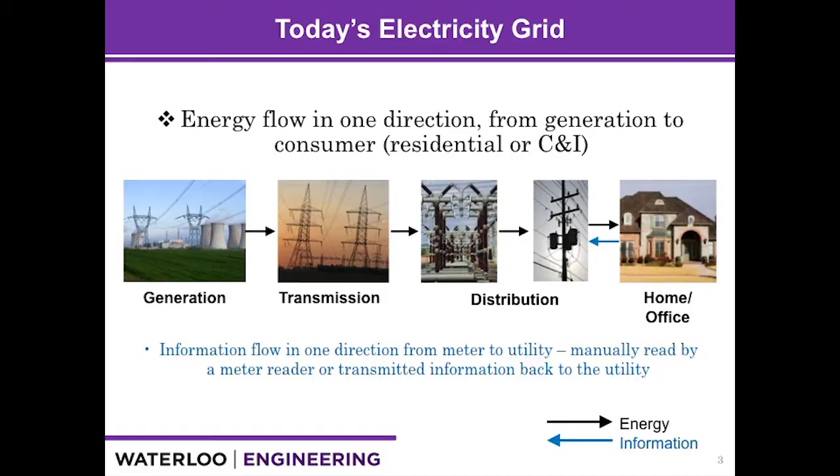Thank you so much. It's a great honor to have the opportunity to introduce our work on the rechargeable zinc battery here. And since our panel topic is energy, right? Definitely, we will mention energy is critical in the next decade, because we have more and more people, right? And as you can see here, the top problem that we are facing in this century will be energy. So since energy is important, the majority of energy that we are using actually is in the form of electricity.

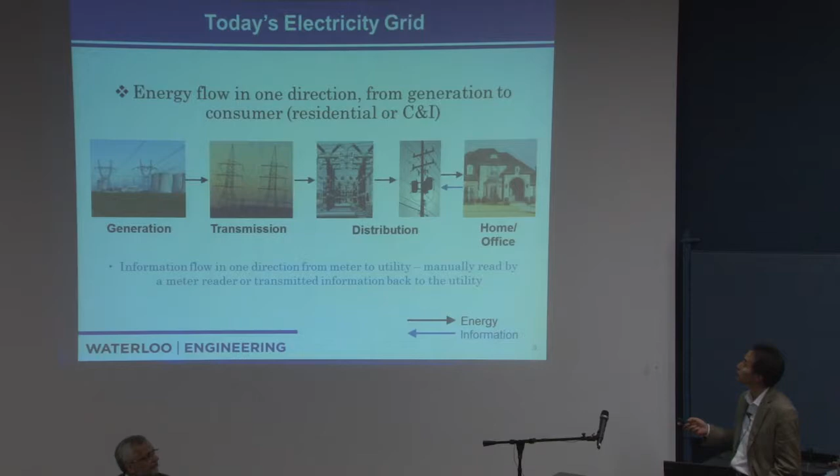So when we talk about electricity, we have to talk about our grid. Today's grid is more like this: from generation to transmission and distribution to the home. So mainly it's only one direction, and only between distribution and home is there feedback. So this is today's electricity grid. Then for the electricity grid, there is a big chance for us, because at the current stage we need more and more electricity, so we need more electricity grid.

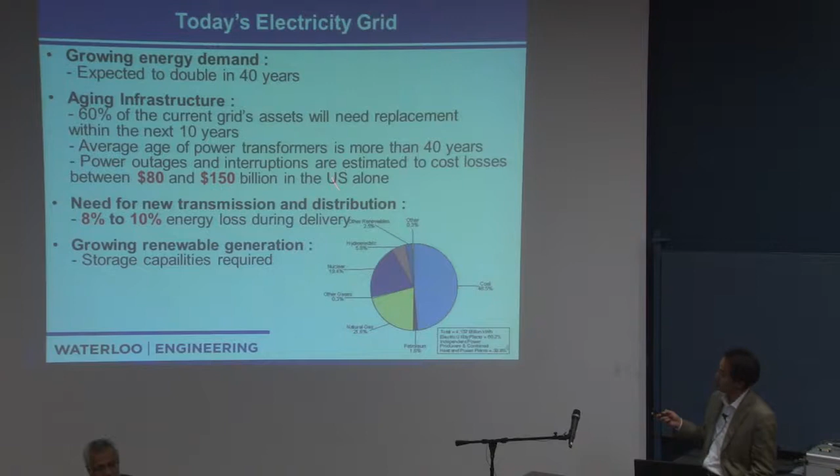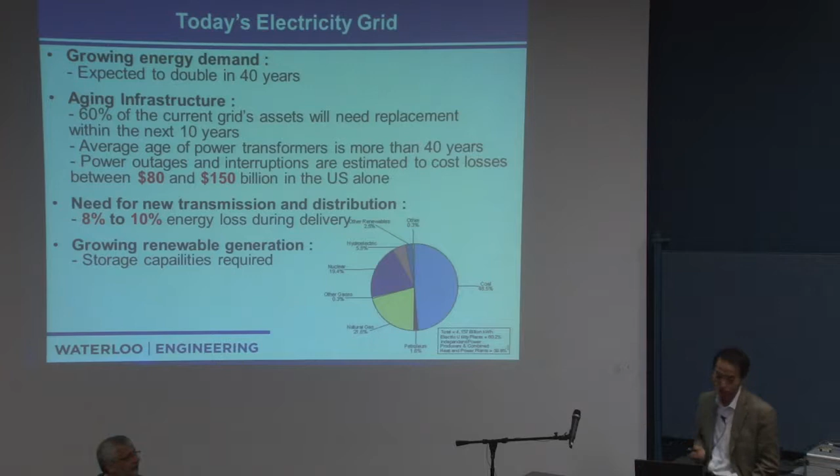So in North America, especially the U.S. alone, in the next 50 years, $80 to $150 billion will go to the electricity grid, right? And also, at the current stage, when we deliver electricity, there is a big loss, 8 to 10%. So in order to improve the electricity efficiency, we should try to go to what we call a smart grid. So what's the smart grid?

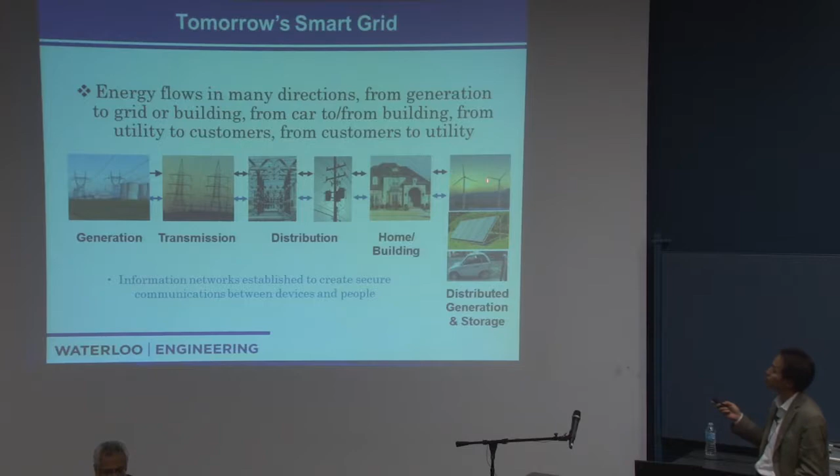So this is a schematic of the smart grid. We call it the next generation grid, or tomorrow's smart grid. The difference with this smart grid is there is more feedback, right, between each system. Between generation and transmission, you have communication with each other, and also between transmission, distribution and the home. Especially, another system is introduced, which is renewable energy with the electricity transportation system. So this is the difference.

If you take a look, the difference between tomorrow's smart grid and today's electricity grid is that this smart grid has another important component, and also more communication among them. So that's the smart grid. With tomorrow's smart grid, it is expected that we can reduce carbon dioxide emissions greatly. And also we expect to save a lot of money, because it can improve energy efficiency, right? And definitely, by using the smart grid, we expect we will pay a smaller bill, right? Lower bill.

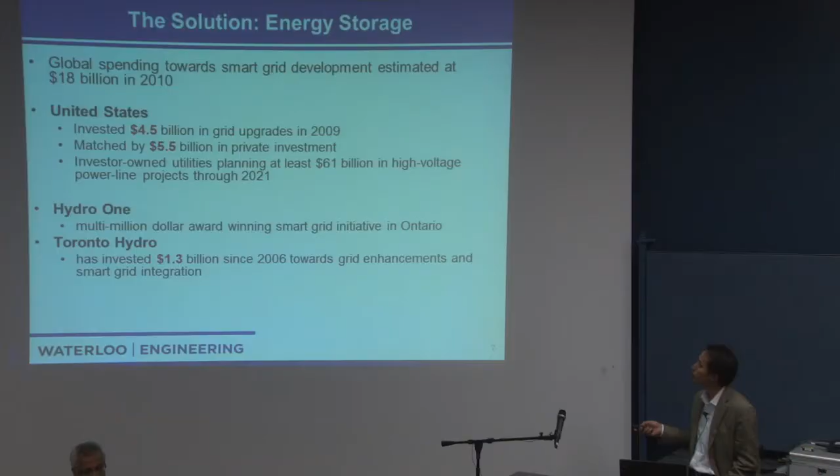So with this expectation for the smart grid, if we go to our local area, like Toronto Hydro, since 2006 they have invested $1.3 billion into the electricity system, and in North America it's even bigger. So for the smart grid, one of the biggest challenges, I would say, is dealing with energy storage. For each section of the smart grid, we need an energy storage system.

Especially when you go to the substation scale or residential scale, we need a very good energy storage system, which is related to the battery technology or the hydrogen technology. So in order to make the smart grid happen more efficiently, we have to find a very good, low cost and high efficient energy storage system.

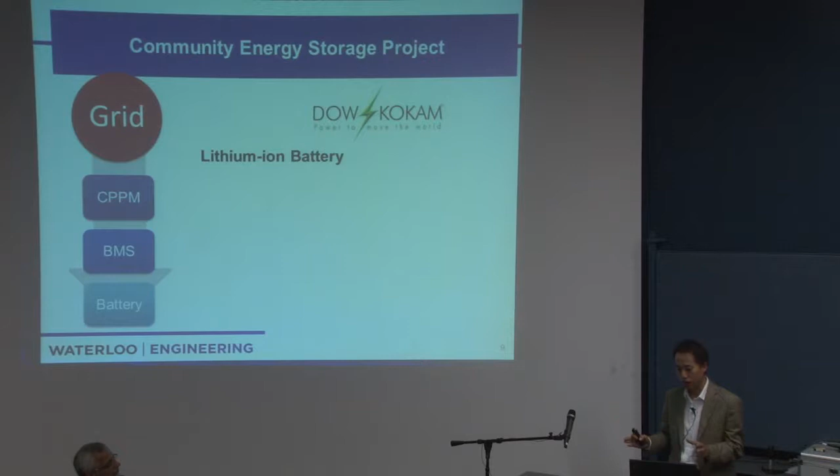So with this goal, when we talk about the smart grid, this is actually the slide provided by Dow Kokam. Dow Kokam, as you know, demonstrated the first stationary energy storage system for the smart grid locally in Toronto. As they claimed, for the smart grid system, if you take a look at this slide, the battery will cost 60% of the total smart grid system application.

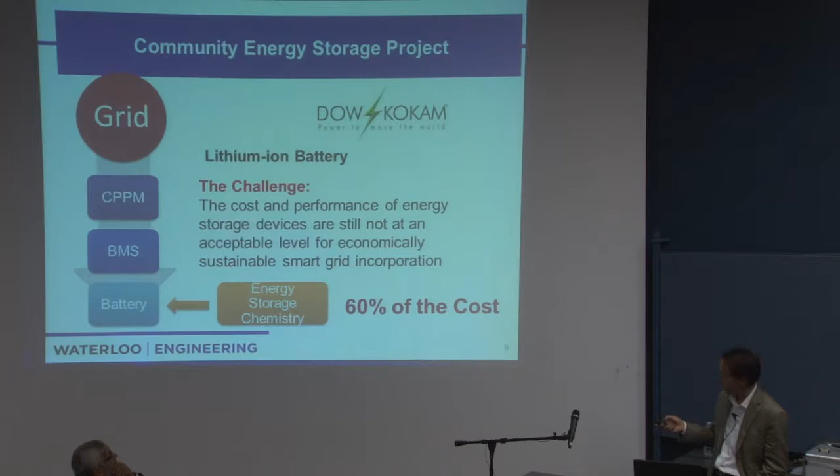So which means if you want to make the smart grid widely available, you have to reduce the cost. At the current stage, the biggest challenge is the high cost for the smart grid. And the biggest cost actually is from the battery, because they are using the current commercial lithium battery technology, right? So with this challenge, the battery is very important, right?

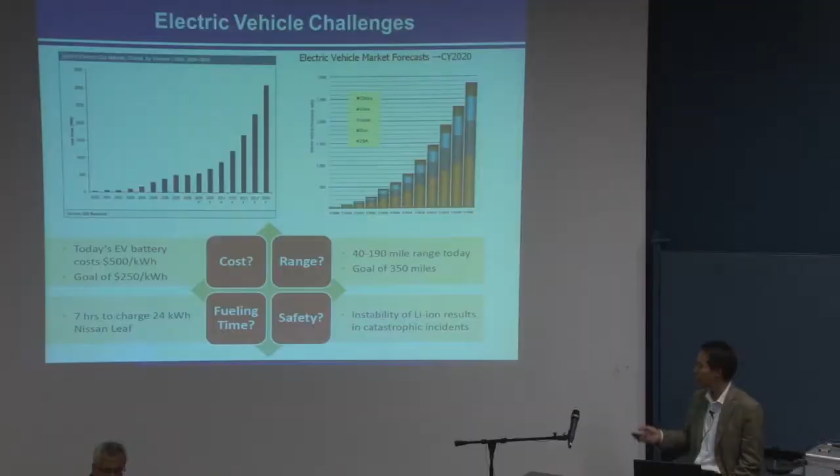And also talk about the electric vehicle. For the electric vehicle, the biggest challenge will also be the battery technology. At the current stage, cost is very high for the lithium battery. And also the range, because the energy density of the lithium battery is still not high enough. For a regular vehicle, we need 1 ton of lithium battery, and the range is not good enough. And you need a long time for charging the battery, so the fueling time is also a problem.

And talk about the safety for the lithium battery technology. Safety is still an issue, right? If you take a look at this slide, you see there is the combustion or explosion problem when you use the lithium battery-based electric vehicle. You must have heard some news. Even the Boeing 787, in the past few months, you heard the story, the Boeing 787 is delayed because of the lithium battery technology used in the airplane.

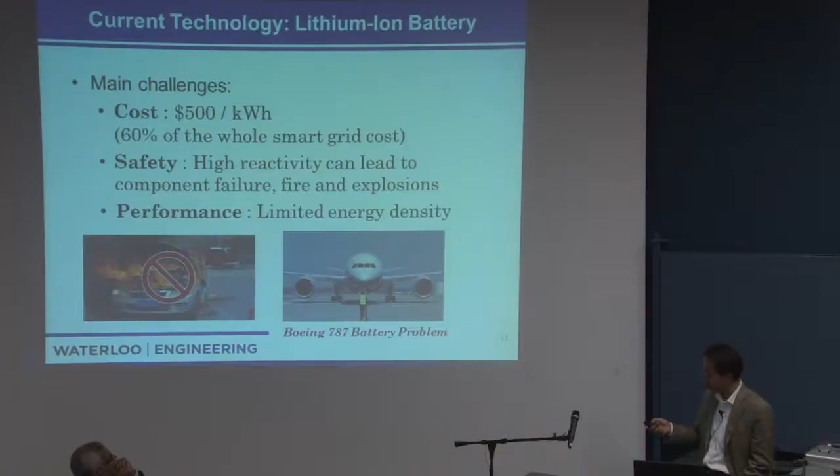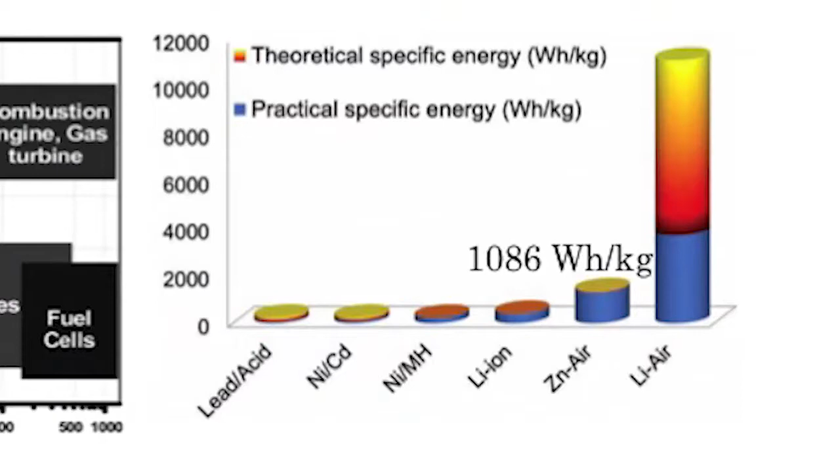So with this challenge, we take a look at this chart. Number one is definitely cost and also energy density. Talking about energy density for energy technology at the current stage, we have electrochemical energy storage systems: supercapacitor, battery, and fuel cell. Fuel cell has the highest energy density, followed by the battery. In this chart, these four are popular commercially available battery technologies: lead-acid, nickel cadmium, nickel metal hydride, and lithium battery. The lithium battery has the highest energy density among these.

But if you take a look at the zinc-air battery and the lithium-air battery, they have even higher energy density than we expect. Because of this high energy density, in academia and also in industry, we think this technology will be the next generation battery technology. That's the reason a lot of research is focusing on this. But the question is, since this technology is so good and the energy density is so high, why is it still not commercially available? There is a reason. So let's take a look.

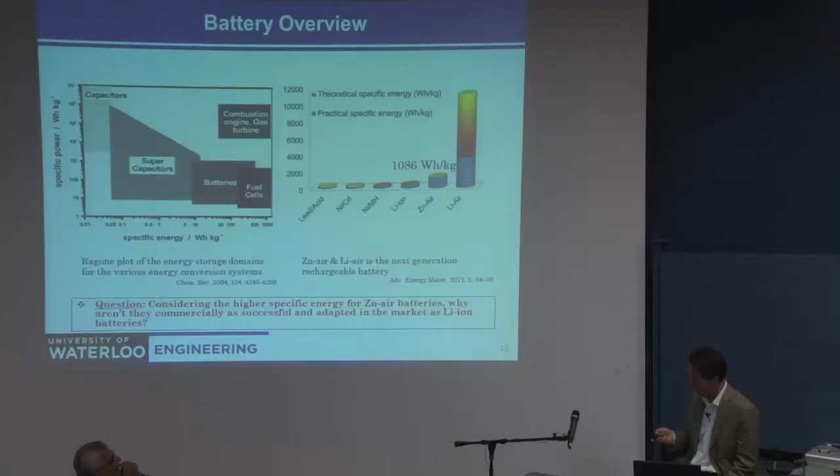Before we look at the reason why it's not available, let's go to the advantages of the zinc-air battery. For the rechargeable zinc-air battery, the reason we think it's great, more specifically, is high energy density. If you take a look at this chart, the energy density is almost 5 times higher than the lithium battery. Which means with the same size, you can provide more power, and the battery can last a longer time.

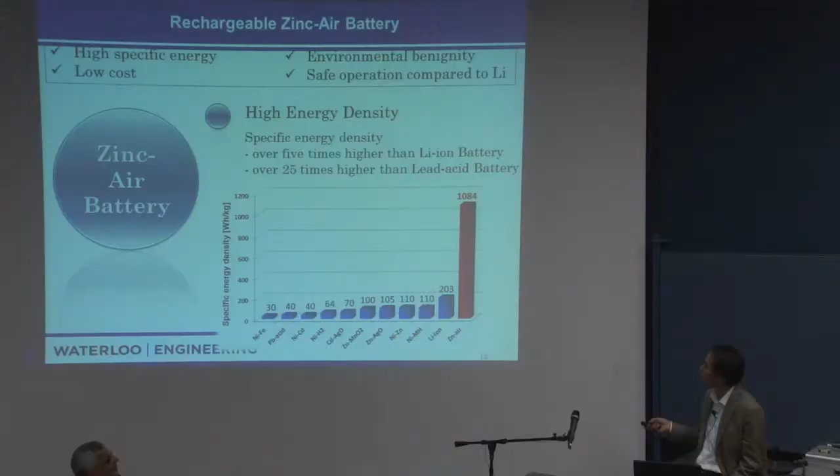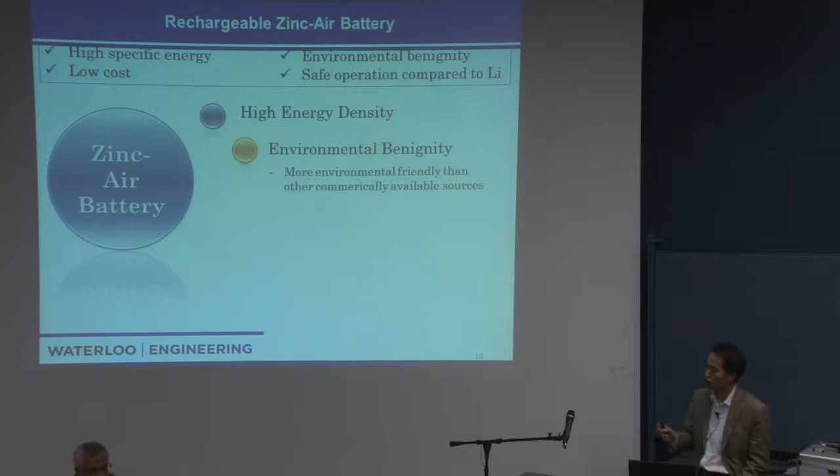And also, the zinc-air battery compared with current battery technology is more environmentally friendly. For example, lead-acid battery, we don't like lead, right? It's environmental pollution. So compared with the current commercial technology, this is much more environmentally friendly. And also low operation risk, because for this technology we are not using organic electrolyte, so we don't have the combustion or explosion problem. And at the same time, the materials we are using in the zinc-air battery are much cheaper.

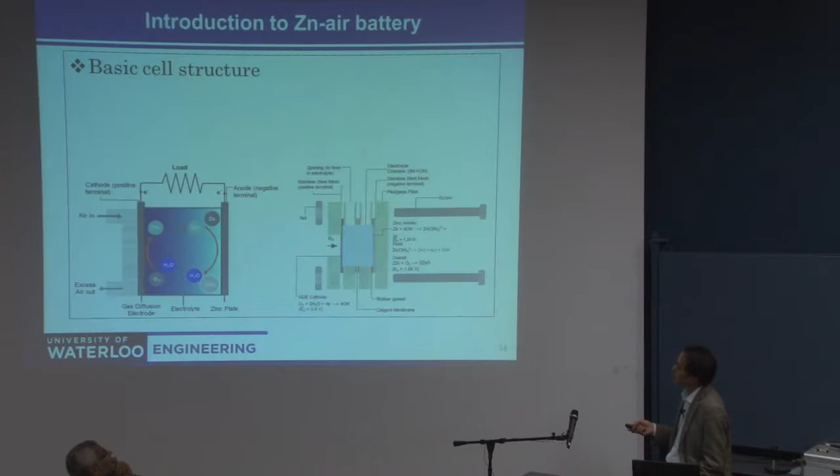So compared with the metal cost, you see the zinc is only $2 per kilogram, but the lithium is $32 per kilogram, right? And also, especially in Canada, we have large zinc deposits, right? So we can use it easily. It's fairly available.

So with this advantage, the previous question is why is the rechargeable zinc battery still not available? One of the main reasons is actually there is no commercially available catalyst for this technology. The reason is because if you take a look at this zinc battery, for this reaction you need a bifunctional catalyst. We call it a bifunctional catalyst because it must involve 2 reactions. One is during the discharge, there is an oxygen reduction reaction. So that produces electricity.

So when you charge the battery, this oxygen reduction reaction needs to be reversed. We call it the oxygen evolution reaction. Which means these electrode materials, or say the catalyst, need 2 functions. It needs to be active and highly durable for both these reactions. Not like the fuel cell, which is only one direction, just discharge. So that's the major reason this technology is still not commercially available.

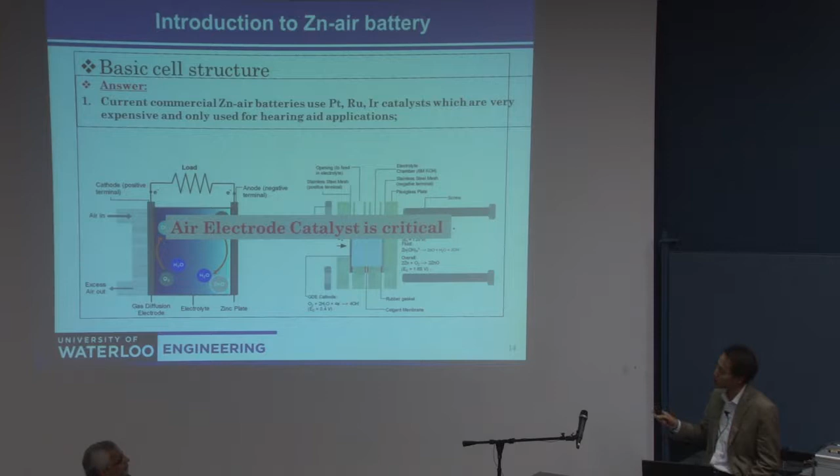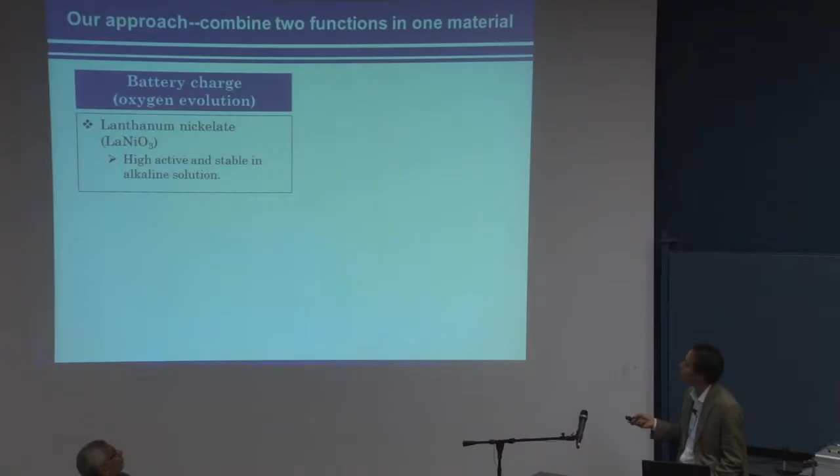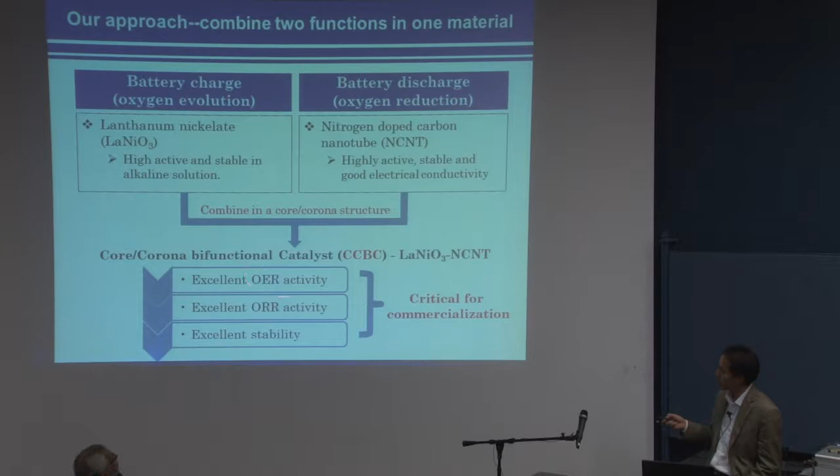And even the precious catalyst, it's good, but the performance is still not good enough for this application, and the durability is very poor. You will see the performance later. So our approach, which we developed at Waterloo in my group, is using nanotechnology design. We designed the core-corona structure catalyst. We call it a bifunctional catalyst. We hope to have excellent OER and ORR activity and also stability. That will relate to the lifetime of the battery, right?

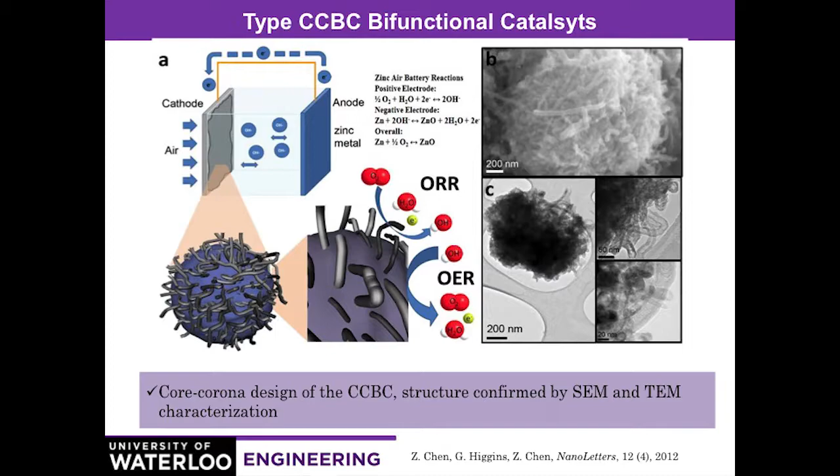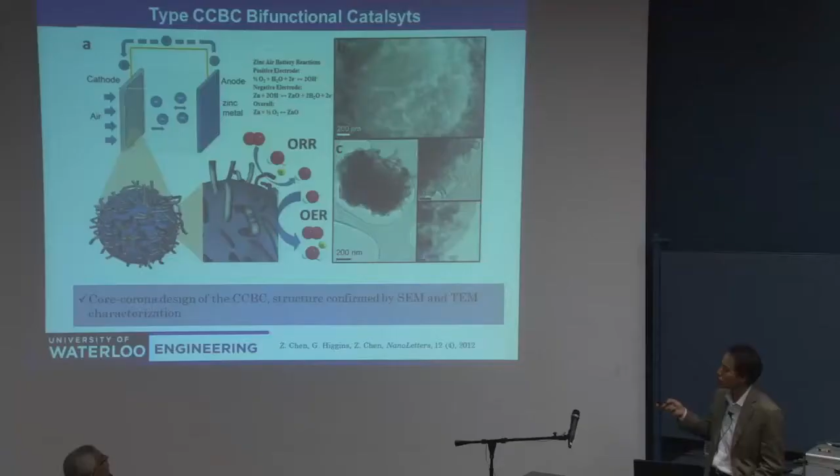So this is the catalyst we designed, a core-corona structure catalyst. And this catalyst, as we mentioned, will be good at ORR, which is the discharge reaction. And also, when we do the charging, this catalyst will also be good at OER. So we have two materials, combined into this core-corona structure by design, and we hope this catalyst will have a synergetic effect during the reaction. That's our purpose, right? So this is the catalyst that we designed.

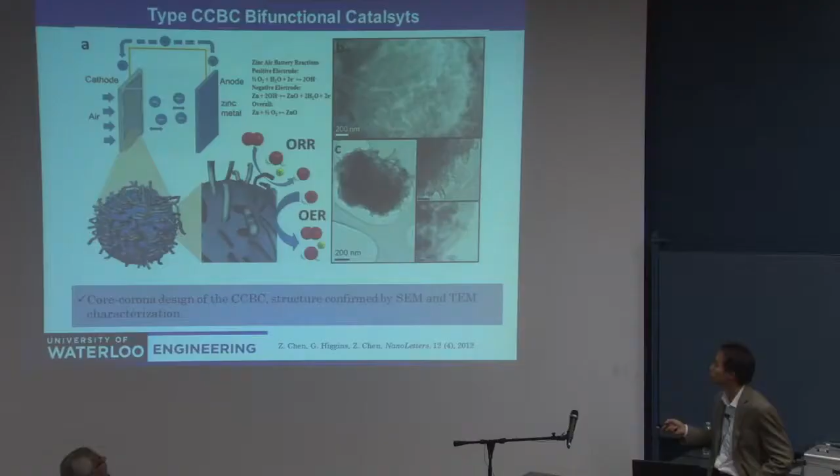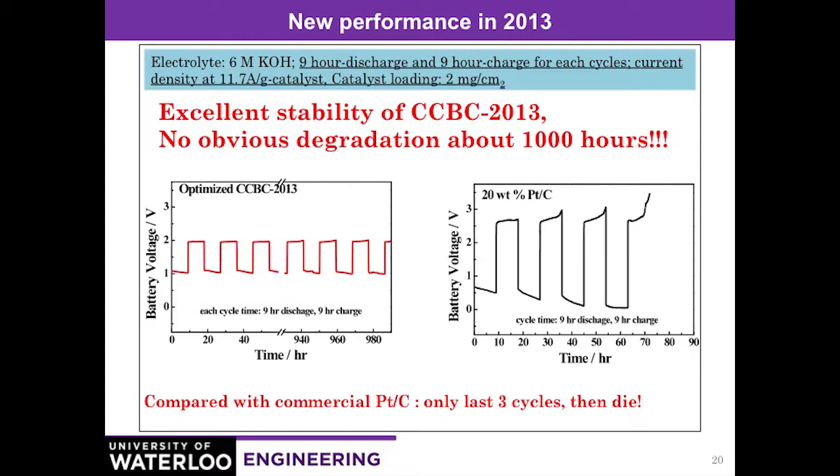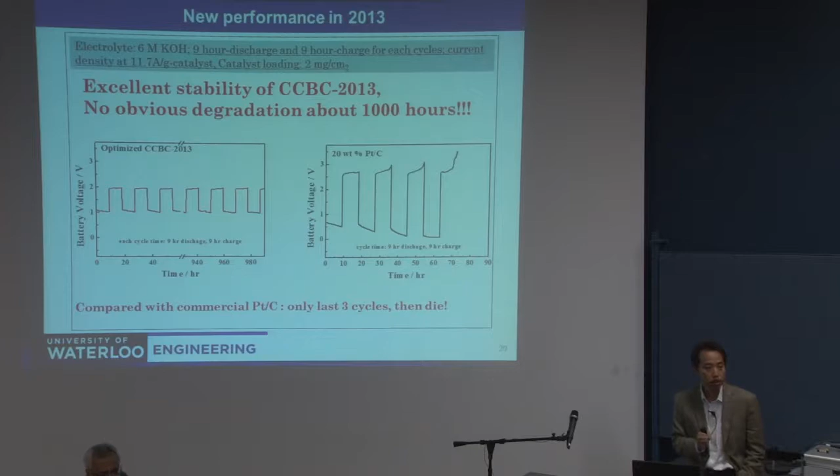With this catalyst, if you take a look at the performance, for the discharge it is the same as platinum, and for the charging it is much better than the platinum catalyst. So this is a very unique catalyst we developed. And for the charge-discharge, for the platinum catalyst, after 70 hours this battery died because the corrosion happened very fast. Platinum is not stable in this system during charge-discharge. But for our catalyst, after 1,000 hours of charge-discharge, there is almost no degradation. So this is a great improvement and breakthrough.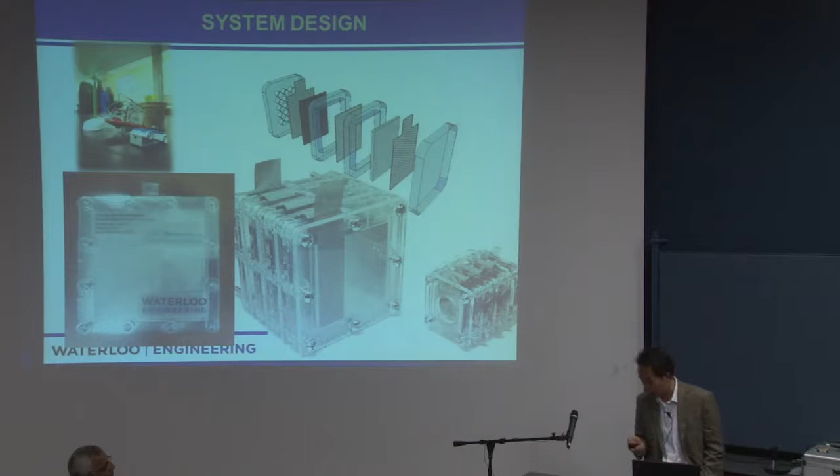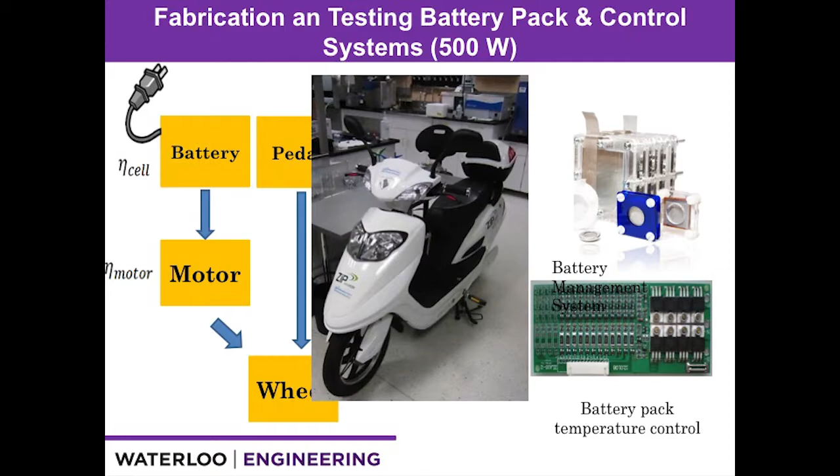At the current stage, we put this battery into this electric scooter for demonstration in our lab. We combined it with battery management systems developed in our labs and put it into this electric scooter. Originally, when we got this scooter, it was powered by a lead-acid battery. Now we are powering it with the zinc battery, and it's under investigation. So this is our goal.

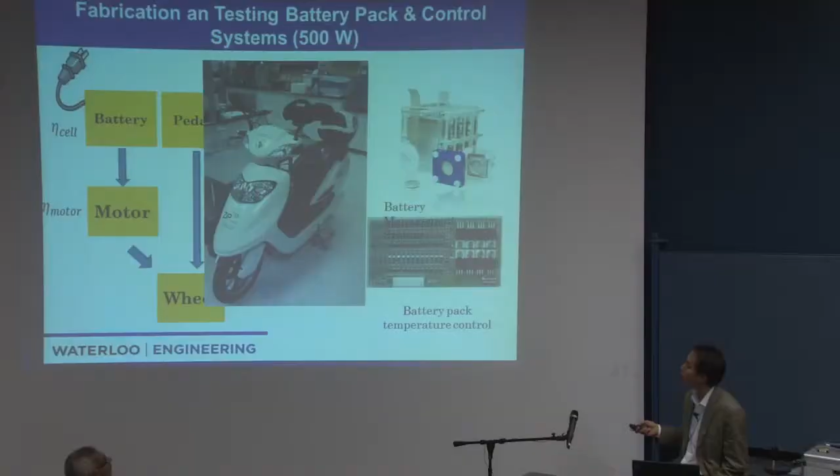And for this technology, we already developed several patents around it, including this unique catalyst and also other components of the zinc battery. And our research office, Saeed is here, is helping with the commercialization. We plan to open collaboration and try to get this company ready in the near future. And definitely we hope this technology could be used in the smart grid and also transportation like electric vehicle systems. That's our goal.

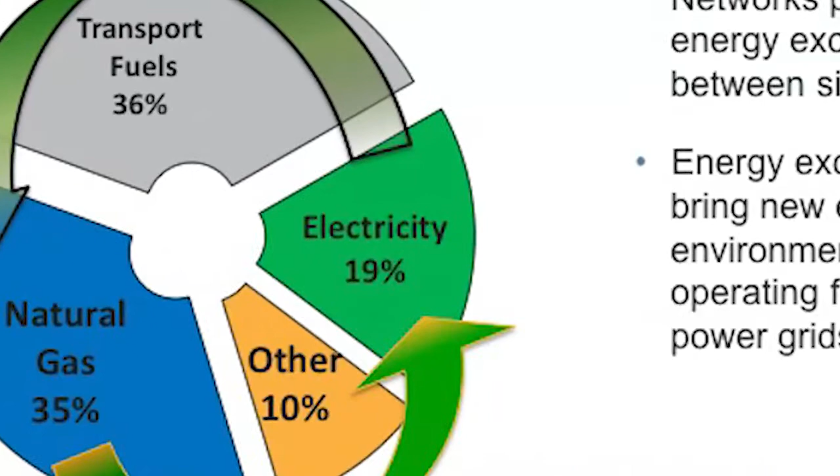The potential for renewable development is highest when you look at PV and solar and wind turbines, geothermal around the world. There's no question the highest potential for renewables is in the electricity sector. The challenge is that the electricity sector only accounts for 19% of the end use of energy. So all this effort, well spent, is going into 19% of the end use. What about the other 80%?

This is Canadian statistics: 35% of the end use of energy is in natural gas, primarily for heating. Another 36% is for transport fuels. And while there's opportunities for renewables and sustainable solutions in both gas and transport fuels, they're fairly limited. There's not enough biomass in the world to create biofuels for the transport sector. And certainly when you start looking at the ethics of using crops for creating biofuels, the amount it would take to make a meaningful dent in the transport fuels is pretty limited.

Power to gas is looking at what your solution set is beyond the electricity sector, looking holistically, and I know much of the work WISE does is looking holistically as well. What if we said the solution set is the electricity sector and the natural gas sector, just for a start? If you could take surplus renewables from the electricity sector, store them in the natural gas grid, and then bring that back as renewable generation within the existing infrastructure for natural gas plants, doesn't that open up opportunity and options? And that, in a nutshell, is the essence of power to gas.

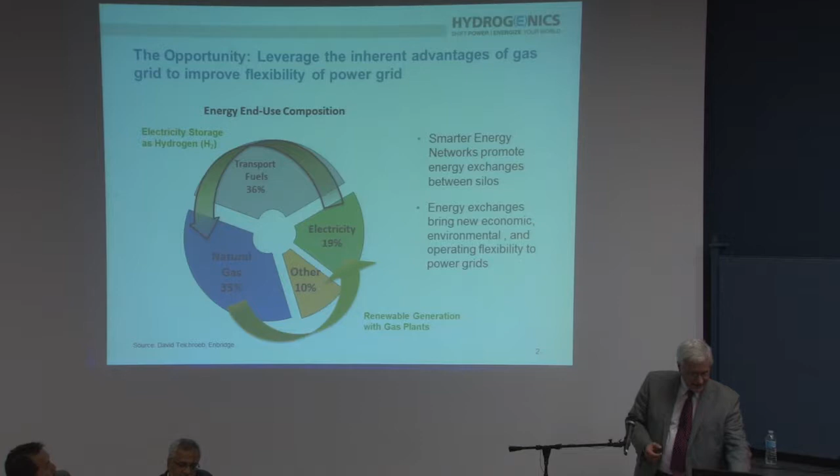How can we leverage the existing infrastructure, specifically the gas infrastructure, the pipelines, the enormous 80 terawatt hours of gas storage in the province of Ontario, and the existing infrastructure for dispatchable generation in our combined cycle gas turbine plants, the concept of smarter energy networks, and use that as a form of storage and a form of increasing the amount of renewables in the overall system. It brings flexibility to the power grid in the process.

In a simple definition, for power to gas, we're basically converting clean generation when we can't use it into renewable fuel, power, or heat where and when we can use it. And we're doing that by leveraging the inherent characteristics of the natural gas grid. In terms of energy storage, power to gas is the only solution that involves the transport of energy.

Most energy storage solutions involve the capture, storage, and discharge of energy, but they're always in one spot. It's where the flywheel is located. It's where the zinc air battery is located. And for many applications, that's exactly what's needed. But when you look at very large-scale energy storage, the ability to transport that energy with the natural gas system is a big advantage.

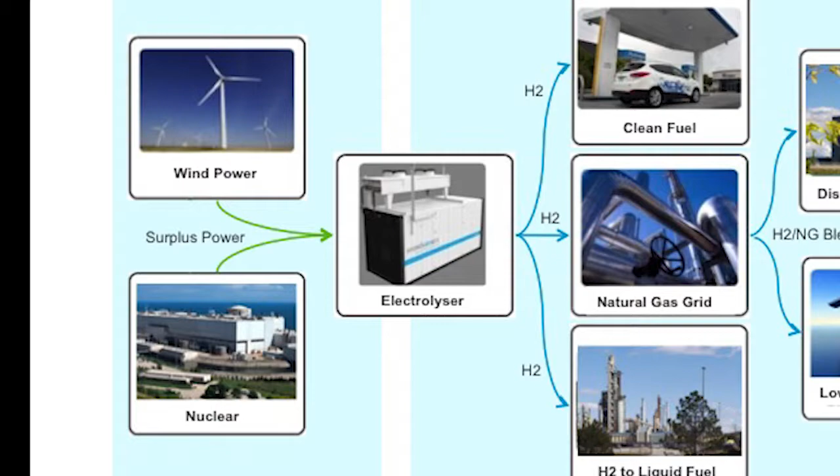If you look on the left panel there, integrating renewables, the ability to capture surplus wind power and in Ontario surplus baseload power in the form of nuclear, clean energy when it's in surplus. The electrolyzer, you remember your high school chemistry, you run a current through water and you produce hydrogen and oxygen. And that's what we're doing. We're using a decades-old technology with some improvements I'll be talking about to produce hydrogen.

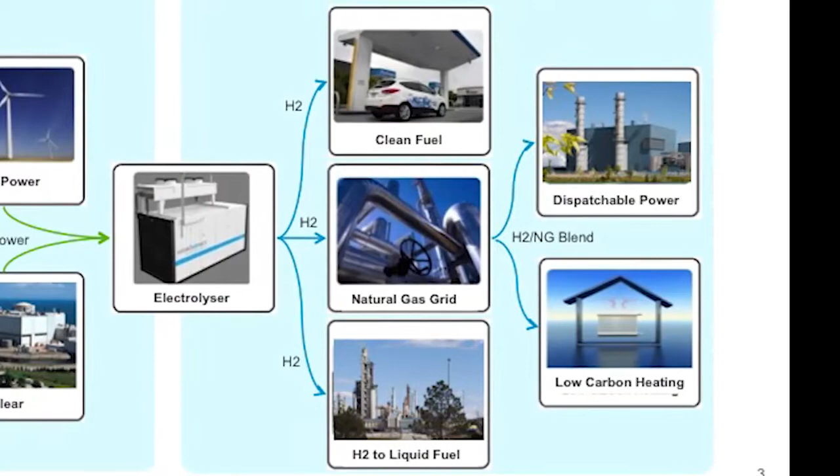And then the options for using that renewable gas are threefold. We can use it as fuel in countries like Germany and Japan and California, where they're building out the hydrogen fueling infrastructure to introduce fuel cell electric vehicles as early as 2015. We can use it as distributed fueling stations. So where you've got the electrolyzer and your power to gas plant, you've got a hydrogen fueling station. Another option is to inject it into the natural gas grid.

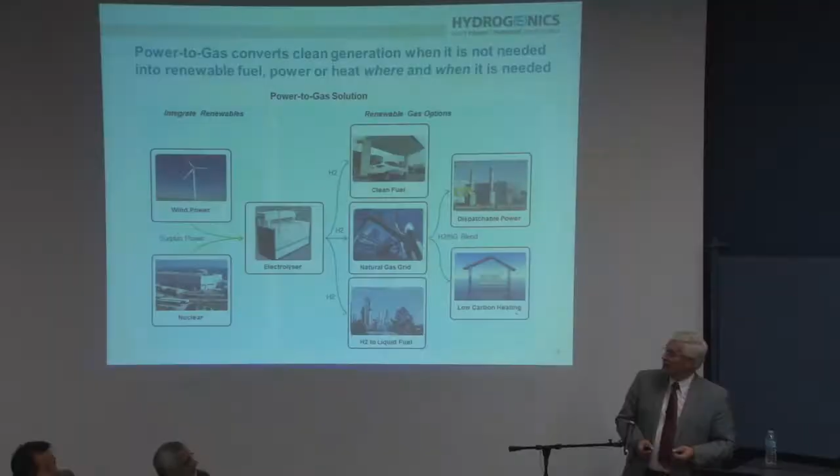As I mentioned, in Ontario, we're blessed with a very robust natural gas infrastructure, including 80 terawatt hours of gas storage. You inject the hydrogen, it mixes in the natural gas, and in effect, you're creating a portion of the natural gas system that is now renewable. And that gas can then be used just as it is today.

It's much like the concept of Bullfrog Power, where you can buy green electrons, you can subscribe. Now, does Bullfrog guarantee that you're going to get those green electrons that came from a wind turbine? Well, of course not. But the accounting for it and the market mechanism is there. The same is true with the natural gas grid.

If we inject 2% or 5% hydrogen, renewable gas, into the natural gas grid, that's spread through the grid, and it will come out as it does today in heat and dispatchable power. You've got a combined cycle gas turbine. If it's running on 5%, then 5% of that power is now renewable. The same is true for low carbon heating. If that gas with that hydrogen content is used in your home, a portion of that is now renewable.

The beauty of it is we've taken a clean but, with wind power, sometimes intermittent resource that's not always there when we need it. It may be at night, it may be seasonal changes. We've captured it, and now we're using it as a clean but dispatchable resource when we need it, coming through as heat or dispatchable power.

The last application is using the renewable hydrogen in the production of liquid fuels. That's a refinery, so if you're producing diesel or petroleum, there's a lot of hydrogen that's used in the production of transport fuels. We're seeing a lot of interest in this in the EU, even in directives that are being debated. We recognize the limitations of ethanol and the ethics of food crops and land being used for that. But if you use renewable hydrogen in the production of diesel and petroleum, you're going to increase the renewable content of those transport fuels and have a very big impact on the carbon footprint of those fuels.

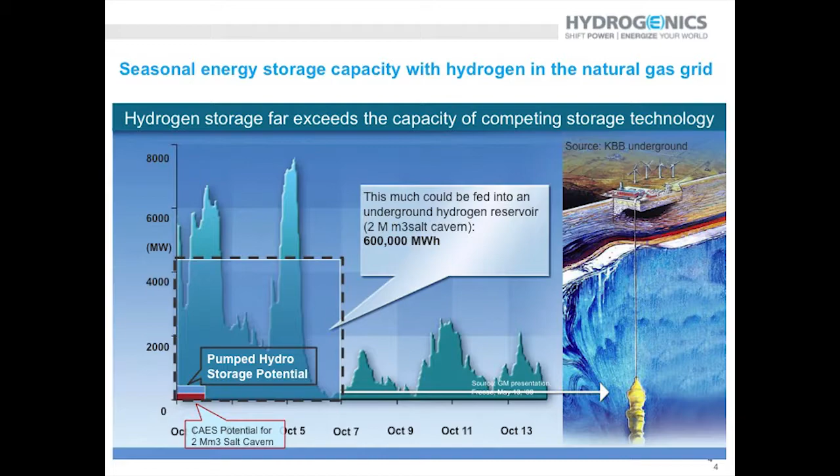Just to give you an idea, the energy density of hydrogen is one of the important characteristics of power to gas. This is an example of a wind profile, I believe in northern Germany. I'll be saying Germany a lot. A lot of the activity in power to gas has been in Germany because they're facing the challenge of integrating high penetration of renewables sooner than most other parts of the world.

Look at this example with a 2 million cubic meter salt cavern. If you were to pump air into that salt cavern, and compressed air energy storage is another technology, the rectangle on the bottom left there represents 4,000 megawatt hours. That's the amount of energy storage if you pumped air into that salt cavern. 4,000 megawatt hours is a lot of power. It's significant. But if you took the same space and injected hydrogen, you would have 600,000 megawatt hours of storage, represented by that dashed rectangle there. So it's orders of magnitude more storage potential in the same space.

And you think, well, why do we need that? This is where it gets into one size doesn't fit all.

I'm going to put a plug: if you haven't already seen it, there's an excellent power to gas poster out there advised by Professor Fowler and a team that Hydrogenics and Enbridge and others are working with to look at some of the characteristics of power to gas. One of the important characteristics is the size of the storage. Lost my point here. Size of the storage, but also other characteristics, looking at the process of hydrogen in storage, researching the movement of the hydrogen and how it interacts with other things as well.

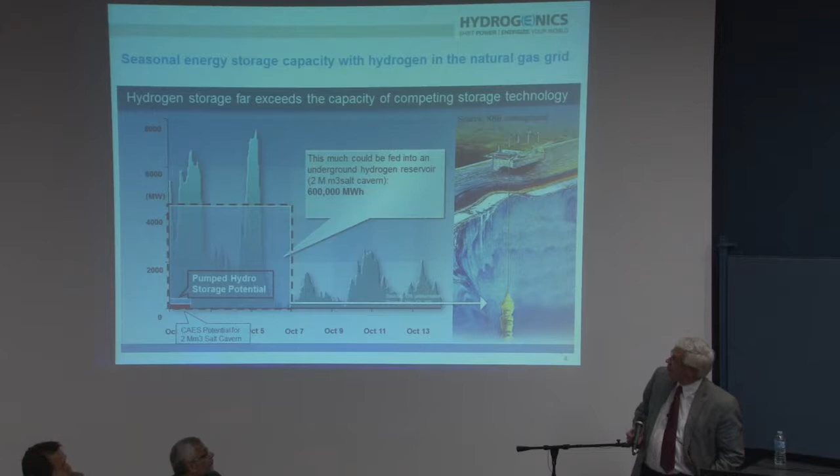There's also a chart on that poster that talks about seasonal storage. You see a lot of charts where peak shaving is a very important application for energy storage. So if you have a surplus of energy at night that you can't use, you store it at night, and you bring it back during the peak during the day, that's peak shaving. But what if it's longer than that? If you look at Ontario and the graphs that they have there, and I could have included the slide, but I was working with the stated limit here.

In Ontario, in the late spring and early fall, we have consecutive days where between the nuclear baseload, must-run hydro, and just an average amount of wind, we have surplus generation for 24 hours. And you have surplus generation for 24 hours and the next 24 hours. And if you're dealing with a peak shaver, like pumped hydro, well, the first day everything's fine. You fill up the reservoir, you absorb the power, and you've done your energy storage for night.

Well, the next day you can't bring it back because you've got a surplus the next day, and the next day, and the next day. And you would need an extraordinarily large reservoir to store all the excess power that you have. That's the concept of seasonal storage, storing excess power in the spring and bringing it back in the summer. And the natural gas system is a very large sink that we can use for seasonal storage.

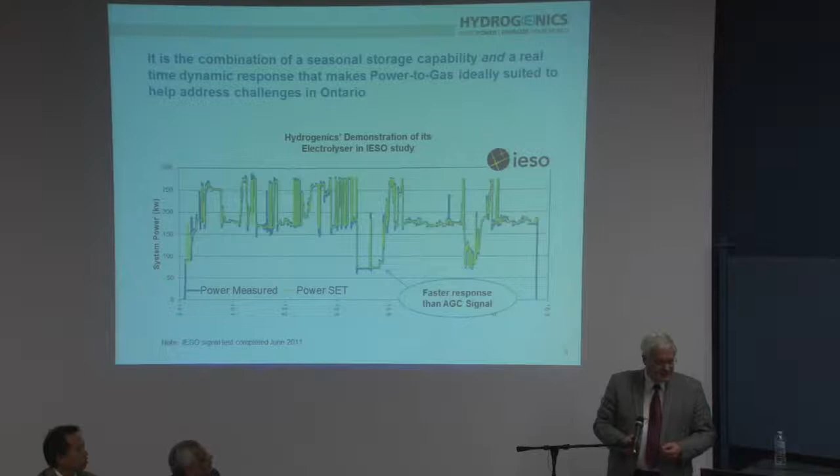Another characteristic of an electrolyzer is that it's very fast. People don't think about it, but it's as fast as a flywheel. A flywheel has a millisecond response to an input signal for either absorbing or discharging energy. This is a test that we did with the Independent Electricity System Operator back in June 2011, and they provided a signal which is set in the green, and then the blue underneath is the response of the electrolyzer. So you can see that it's a very fast response.

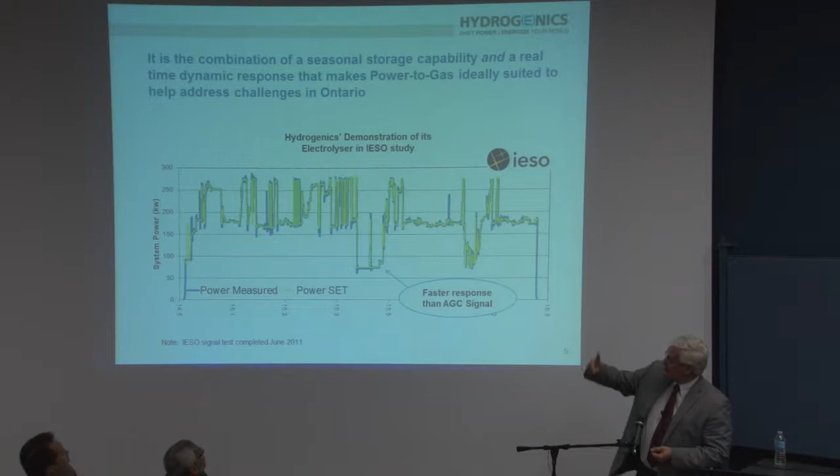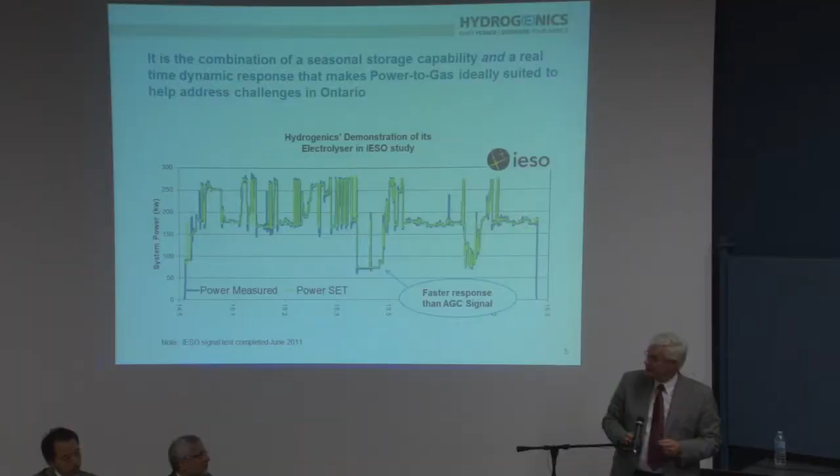In the management of the electricity grid in Ontario, the IESO sends out a signal every 4 seconds to those that provide what they call frequency regulation to help do the fine-tuning of matching exactly the supply and the load in Ontario for power, and they're doing that every 4 seconds. An electrolyzer can provide that role while it's providing that storage as well.

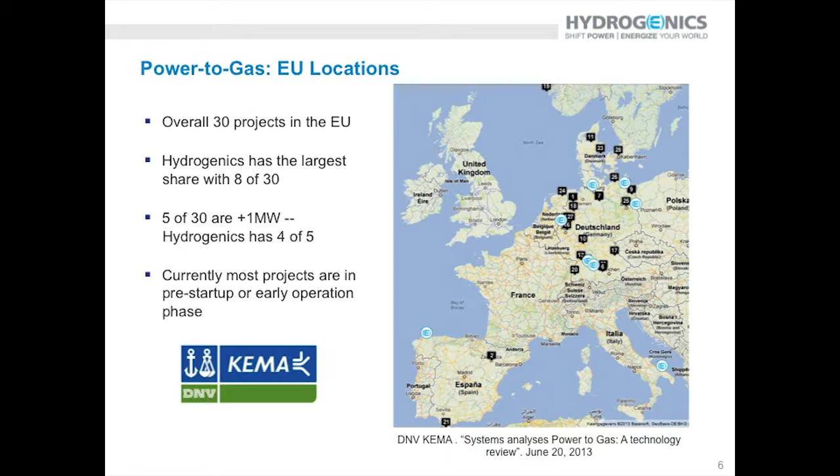To give you some idea of what's gone on, most of the activity, as I mentioned, with power to gas has been in Europe. There have been 30 demonstration projects for power to gas announced to date, and 18 of those are in Germany. Why are there so many projects in Germany? The whole concept of power to gas was developed in Germany to deal with the challenges of very high penetrations of wind. In 2012, 25% of Germany's electricity was provided from renewable sources, which is remarkable. And the aggregate capacity factor for their wind fell below 20% for the first time.

Now, is it because they don't know where to put wind turbines? Of course they know where to put them. A typical capacity factor for wind in Germany is on the order of 33%. It may be higher in some locations, but in aggregate over the country, it will be about 33%. So fully 50% of the potential capacity is being wasted, is being curtailed. And that's today. As they accelerate the decommissioning of their nuclear fleet and add more renewables, that challenge is just going to be harder. So that's why there's intense interest in seasonal storage and power to gas in Germany.

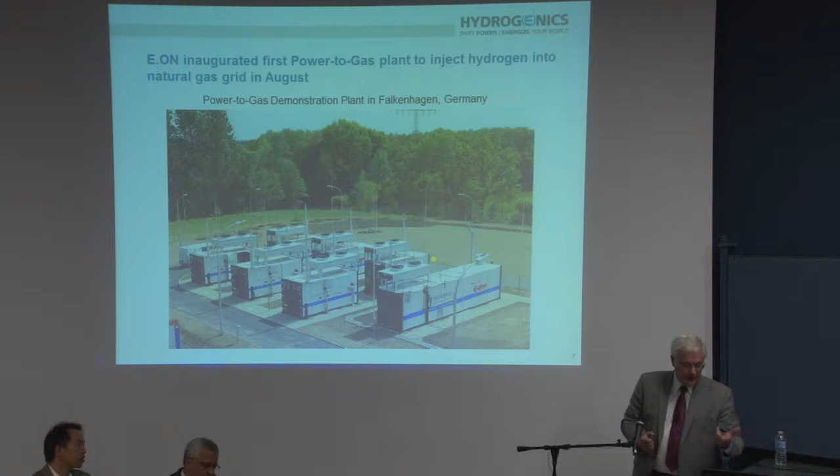Just quickly, some of the other applications I mentioned are also paralleled in Germany. There are applications for hydrogen fueling stations. There are applications for green compressed natural gas with biomethanation processes, working with anaerobic digesters to produce synthetic biomethane for fueling. Audi is a company that's involved in that. They call it e-gas. There are also demonstration projects for industrial hydrogen as well.

Closer to home, we're working with Enbridge, the IESO and the Canadian Gas Association to do the first power to gas demonstration project here in Ontario. The objectives are to demonstrate the ancillary services potential, frequency regulation, and potentially other services needed in the future, such as ramping with the IESO. It will be PEM electrolysis, the proton exchange membrane, the next generation technology I'll be talking about in a moment, for larger scale deployments. And we're working with the Canadian Gas Association, particularly their research arm, on setting gas interoperability standards and metering. There are no regulations in Ontario, and probably anywhere in North America, for injection of hydrogen into the natural gas grid today.

And I've kept it to the 7 slides. The one other comment I'll make just on the PEM electrolyzer: you saw the picture with 2 megawatts, and you see those are ISO 20-foot containers. You can imagine for energy storage, when you're talking large scale, we'll need 20, 40, and perhaps 100 megawatt sorts of projects, because at the times of surplus, you need a lot of capacity to absorb that surplus. You can imagine if you had, this is 2 megawatts, if you needed 40 megawatts, you're taking a lot of

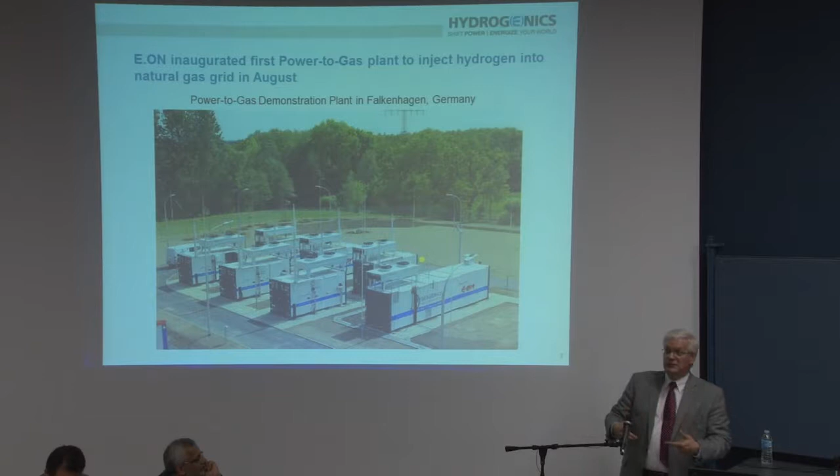space. The next generation PEM electrolyzer is basically the size of a bar fridge. And a 40 megawatt project would fit on 60 meters by 25 meters in a building. So it is the platform, the technology platform we'll be using to do commercial scale power to gas projects.

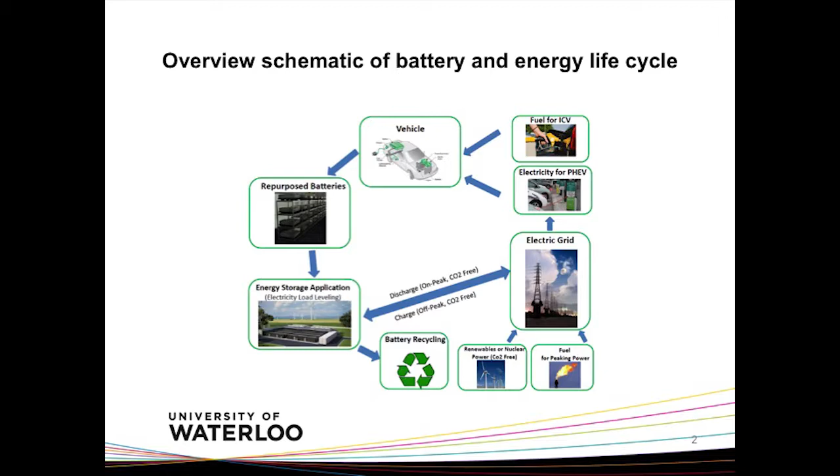So what we're actually talking about is when you look at a plug-in electric hybrid vehicle, you're going to be putting fuel into that vehicle and you're going to be putting electricity into that vehicle that comes from the grid. We're going to take the batteries out of that vehicle once the battery is finished in the vehicle and repurpose it so that we have it for electrical storage. And then we'll be taking electricity from the grid during a low peak time, putting it back into the grid during high peak time before we actually put that battery in for recycling. Otherwise, it would go directly from the vehicle to recycling.

So when we look at that, the grid right now is getting renewables, clean energy, CO2 free from nuclear, and wind and solar. And it's also getting fuel, and we'll say natural gas. We'll try to ignore the fact that we still have a bit of coal in Ontario.

Right? So the motivation is that we're going to see a lot more plug-in electric vehicles in the future, a lot more electric vehicles. The powertrains are going to have large battery packs, and there's a significant investment in that battery pack. The battery pack in the Chevy Volt runs about $20,000 right now. So they're quite expensive. So repurposing the batteries employed in these vehicles into a second use, we get more value out of the actual manufactured products.

And when it's in the plug-in hybrid electric vehicle, once it's down to about 80% of its initial capacity, that's when it's going to come out of the vehicle. And that's based on customer demand. So when I can only get 80% of my original range, I'm going to want it out of my vehicle, and I'm going to want new batteries in there.

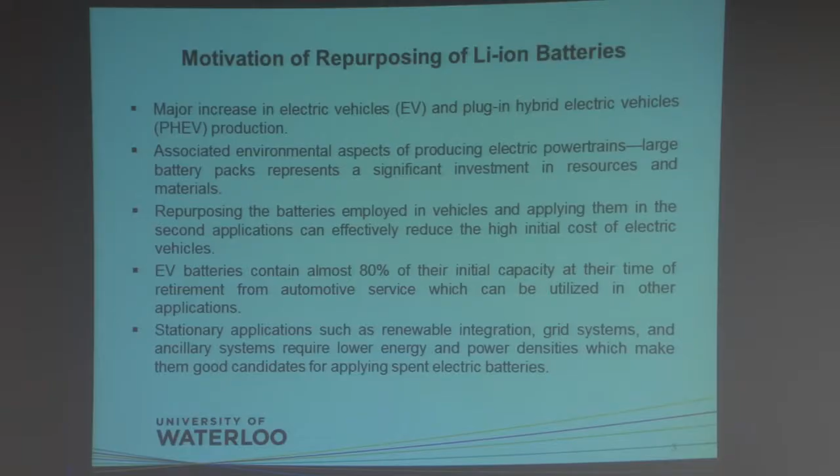And that's where stationary applications, such as renewable integration, grid systems, ancillary systems that require low energy, come in as good candidates for these spent electric batteries. They still have good capacities in those applications. They just aren't good for vehicles anymore.

So I'll come back to this, but just tell you what we mean by cascaded use. So originally you'd manufacture your battery, you'd put it into your vehicle, and at the end of its life, you would send it for recycling, and then you would have to remanufacture a new pack.

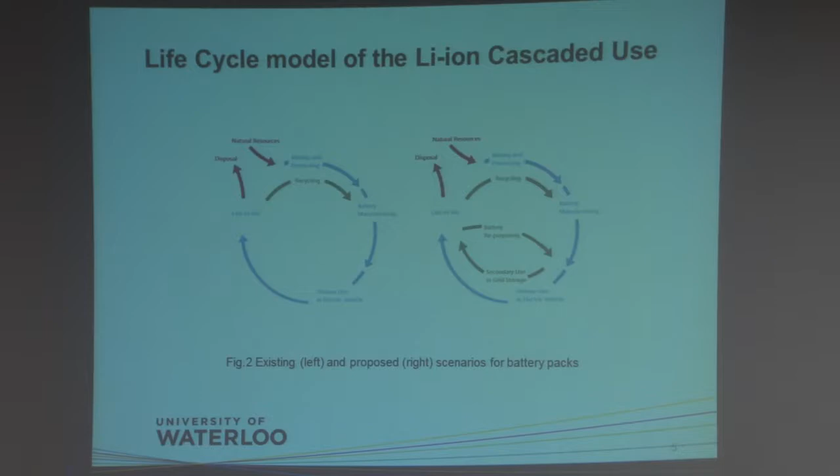What we're trying to do is that when we have the battery, when it comes out of the vehicle, we're going to put it back into its second use, which is secondary energy storage in stationary applications. Use it in that storage before we bring it back in for recycling. So we're actually reusing a product that has already been manufactured.

Now the advantage of this is, if you look at the competition, you have an internal combustion engine. When I put gasoline in an internal combustion engine, over the life of a vehicle, which is about 8 years, and then we're saying about 10 years life in a secondary application. So if I have an internal combustion engine, I'm going to generate a certain amount of carbon dioxide by burning gasoline over the life of that engine. And in the second use, we're saying peaking power is going to come from a natural gas plant, and the natural gas plant is going to generate a certain amount of CO2 over that 10-year life.

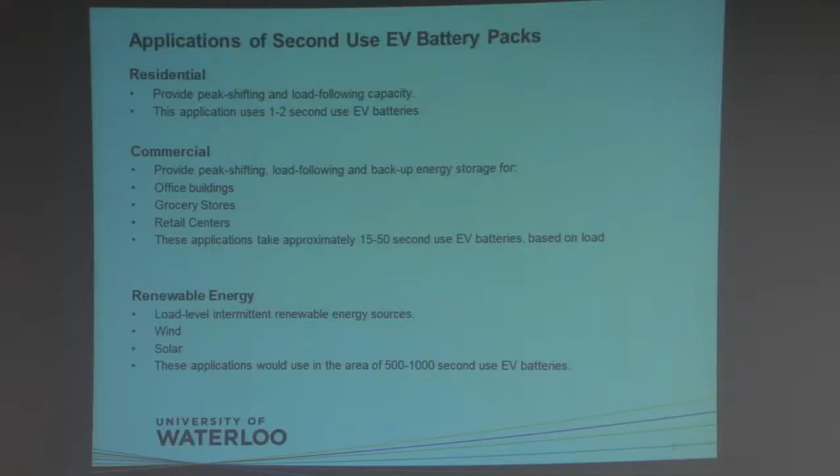But in these applications, they're going to need 500 to 1,000 EV batteries. That's a lot of batteries. That's a lot of storage. And we don't envision this application actually taking place. There's just not that many batteries coming out of the system right now, and there won't be for at least another couple decades. And so we see the first 2 applications being much more applicable.

So that's my 7 minutes to talk. But I'm going to steal Jaitan's throne here for a minute, and I'm going to get the discussion going on energy storage.

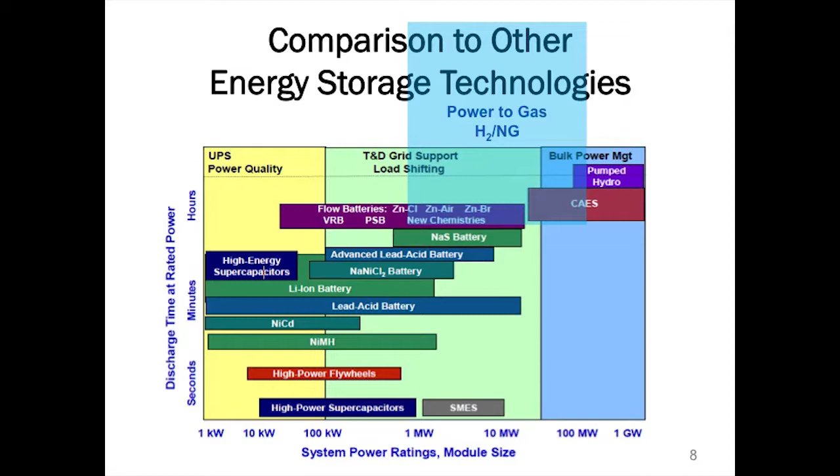So this is actually from one of the national labs. When they talk about all the different energy storage applications, you see pumped hydro, compressed air, different types of batteries, lithium-ion batteries here, some of the older batteries, lead acid, nickel cadmium, and some of the supercapacitors here. Down here you see how big the energy storage applications could be, and here how long you could be storing the energy. So all of the storage applications that they looked at in the national labs, they're really storing them for hours, not even daily storage, right?

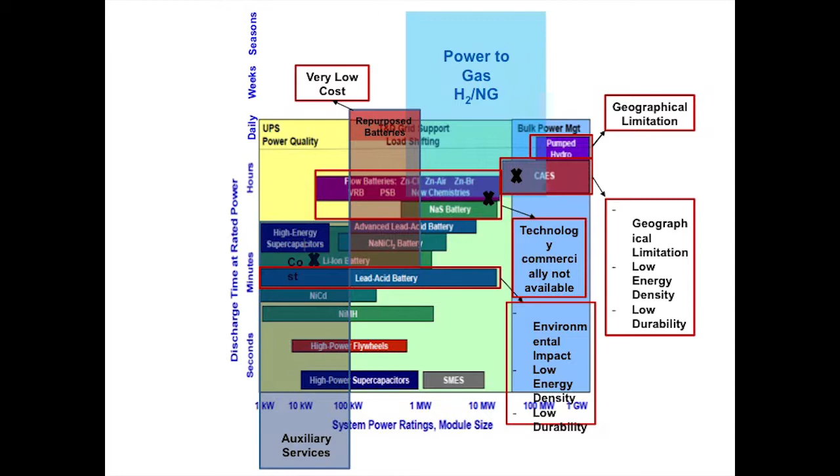Whereas power to gas, which was introduced by Rob earlier on, has a real advantage in that not only can I store it for hours and daily, I can store it weekly, I can store it seasonally. So power to gas has real advantages and high energy densities. But now the same diagram, where I'll raise a little controversy here to get our discussion going.

Pumped hydro is great if you have the right geography, right? But it's very limited that we have that geography. Compressed air, geographically limited once again, low energy density, low durability. Personally, I just can't envision these giant silver bags at the bottom of Lake Superior, right? Just can't envision that.

What Dr. Chen presented, excellent technology, super high energy storage that you're going to get out of zinc air, flow batteries, some of the other new technologies that are coming on. And Dr. Chen's making real advances. You might see his technology commercialized in 10 years. All these technologies are a long way away from being commercialized. Lead-acid and lithium-ion batteries, they're there now.

And you say, well, why don't you use brand new lithium-ion batteries for energy storage? I will, but remember, that battery pack in my vehicle costs $20,000. You're not going to be using that battery pack to make toast, right? But when it comes out of my vehicle, what's it worth? It's salvage, it's scrap. I might even be paid to take it off their hands. So it's very low cost repurposing batteries.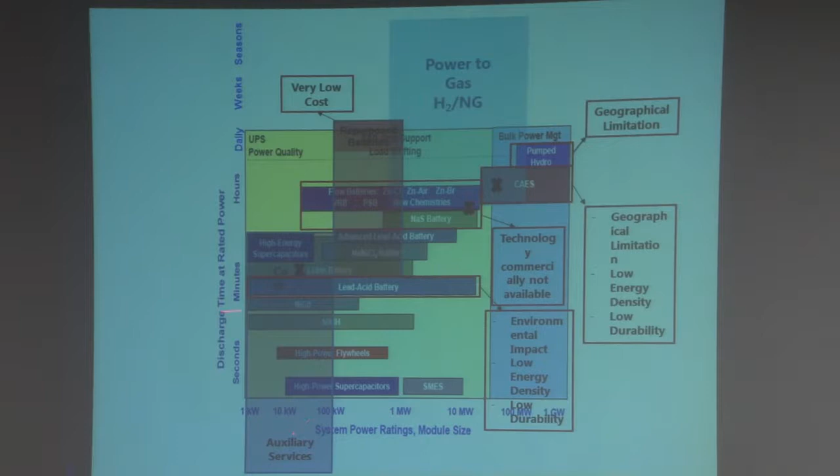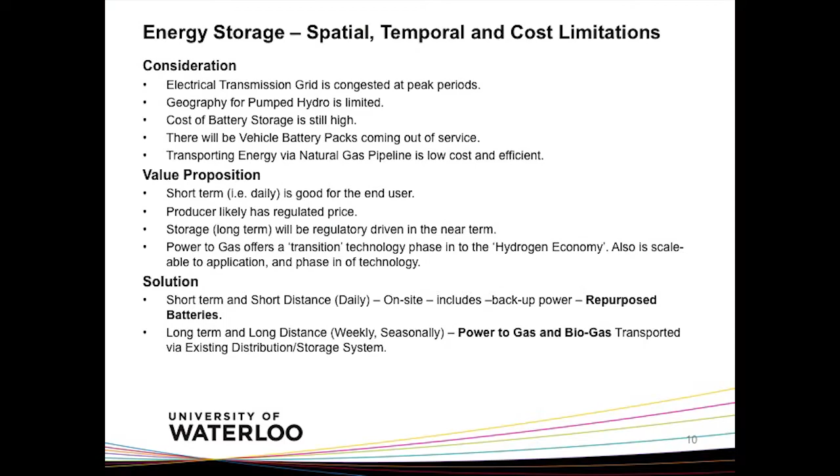And then there's the other application that Rob Harvey talked about, which is really auxiliary services. It's not really energy storage, it's a much more short-term solution. So where does that leave our discussion? Well, in Ontario, we've got a congested electrical grid. Pumped hydro, yeah, Niagara Falls is good. We could spend $900 million and build a giant tunnel and have good pumped hydro storage, but that geography is limited. The cost of lithium-ion battery energy storage is still extremely high. It just hasn't come down yet.

Vehicle battery packs are now starting to come out of service. We have plug-in hybrids, and we're starting to see those vehicles coming out of service. And if I want to move energy around Ontario, it's actually better to move it in the natural gas pipelines than the electrical grids. It's low cost and very efficient, and that infrastructure already exists. We have energy storage infrastructure that might become underutilized. We have pipeline infrastructure that leads to almost all of our homes. So what we really want to do is look at what I call the value proposition.

Short-term, daily storage is good for the end user. If I own my building, I care about that. The producer likely is selling his power at a regulated price, so he probably doesn't care so much about energy storage. So energy storage in the long term is probably going to be driven by the regulator, right? So power to gas has a real advantage, and then it offers us a transition technology to ultimately the hydrogen economy.

No matter what people say, all the car manufacturers, all the OEM manufacturers, GM, Chrysler, Toyota, they're all bringing on board fuel cell vehicles, and they're all going to be commercialized in 2015 to 2017. And yes, they're going to have limited penetration in Southern California, but eventually they're going to come everywhere. So it is eventually coming, and power to gas offers this excellent transition to start to generate some of the hydrogen for that.

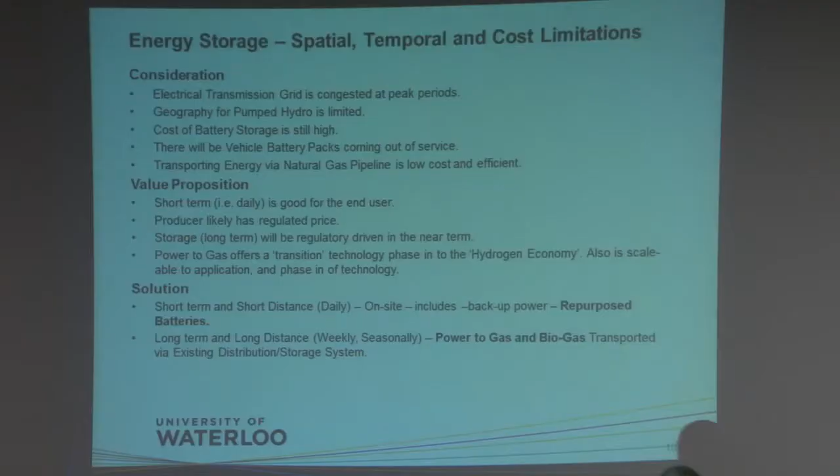So I will remind myself to repeat the question just for recording purposes. Any questions from the audience? Yes, please. How large exactly is the natural gas pipeline? Like when you say seasonal, can you literally store enough power for the winter season? How large is that? I will repeat the question. So the question is, how large is the natural gas pipeline? Give us a sense of the magnitude of what amounts of power you could store. Is that the question? Yeah, in Ontario.

In Ontario, it's 80 terawatt hours of storage in our natural gas system. And where the storage comes from, it's in southwestern Ontario. Union Gas near Sarnia and Enbridge have facilities. And it's former natural gas wells. Think about Petrolia, Ontario, first in North America, we had significant but limited natural gas in the province, and that's now being repurposed as gas storage and has been since the 1930s.